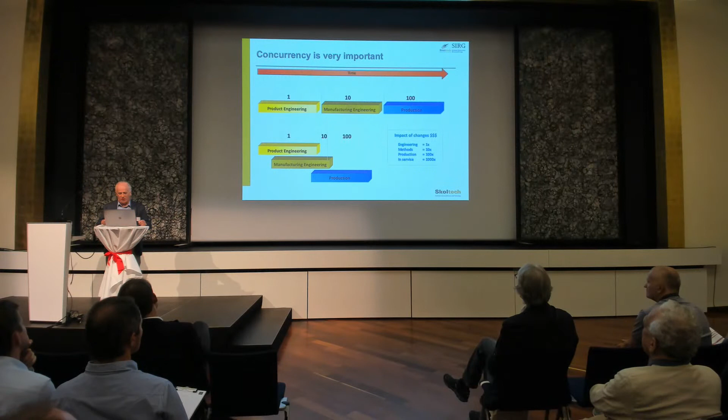So that's where I started. Of course, concurrency, like David said this morning, is extremely important. It's important in terms of errors, and that's what we developed. I will show you a little later a system which can integrate product engineering and manufacturing engineering. But this is just to show you.

Now, the reason why I'm in Moscow is kind of surprising, right? Because I'm from Canada, from Montreal. I'm a mechanical aerospace engineer. I was professor at École Polytechnique of Montreal for a number of years, and I had the perfect R&D job in aerospace in Canada. But I met this guy, Ed Crawley, who published a book in 2016 called System Architecture.

He's from MIT, and he's a friend of mine. One day I went for a conference at MIT, and he said, Clément, I went through my contacts, and he's the founding president of Skoltech, and he said you're one of the professors who could come to help me build this new university. And that's why I'm in Moscow at Skoltech. Ed is a great system architecture researcher, and he's done a lot of work, and we went from there.

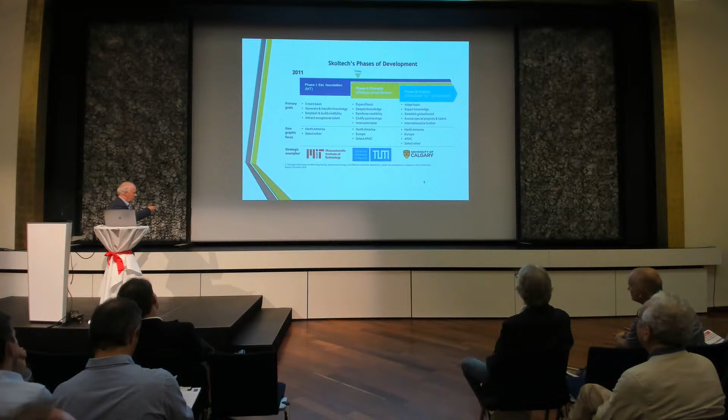Just to give you a brief overview of Skoltech, very briefly: it started in 2011, so very, very recent, in collaboration with MIT, with a very tight collaboration with MIT. MIT was involved in all phases of development of Skoltech. And now we're in phase 2, and we're developing further.

We still have the partnership with MIT. Initially it was in all phases, recruitment of faculty, students, all our students went there. And now it's research projects together. And now we're starting a strategic relationship with TUM also. And we have a strong relationship with the University of Calgary in Canada because of petroleum engineering, as you would know. So that's where we are.

We started when Ed Crawley arrived with his portable computer with nothing in 2011. But of course, a big project and the support of MIT. This is the campus that we have now, that we are installing. And the relationship with Switzerland is that the architects of the building are Herzog de Meuron from Basel. So it's a phenomenal campus.

We are now filling the East Ring, 140,000 square meters of space. So it is a very big and very nice campus. And it's in the middle of an innovation center called the Skolkovo Innovation Center. We are the university here, and there are industrial companies. And it's a city because we have primary and high school, apartments, research centers, startups, and so on.

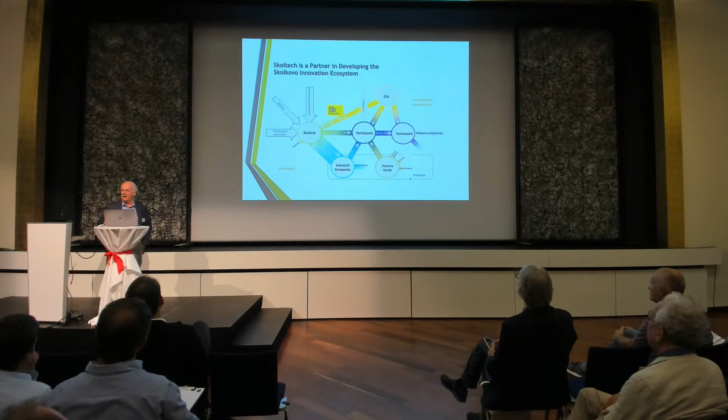So you see that it's a huge initiative, and I have to say that I've been there more than 5 years now. Ed Crawley is back at MIT, but I'm still there.

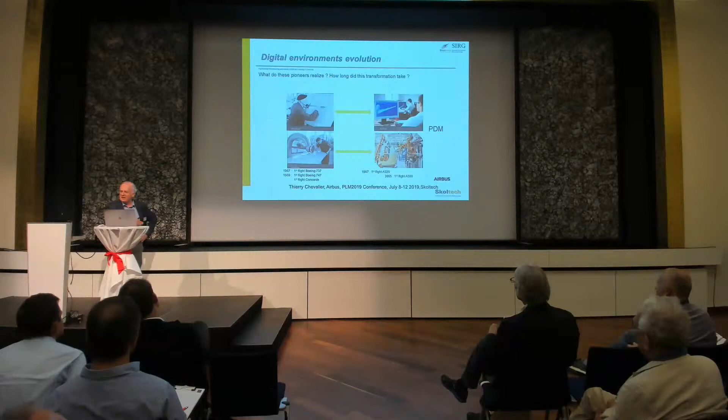Now, let's get into the topic. When you look at the evolution of systems of the digital enterprise and PLM systems in particular, it took about 45 years to go from the drawing table to PDM systems and PLM systems. That's quite some time to go from documents to a digital environment. And MBSE is doing about the same thing, at a much faster pace.

Now the digital twin environment, in 2018, they're doing all kinds of new things, but how much time do we have? We have about 5 years instead of 45 to fully integrate PLM systems into MBSE and cyber physical systems, and AI is coming into that space. So we are on a very fast transformation cycle in which systems engineering is extremely important.

Of course, and I was hearing this morning how important this is. The digital twin is critical, but it's easy said and difficult to do, because if we're looking at in-service, and I'm talking here about in-service and configuration management in particular—doing the right service for the right version of the product in the field—there are some very important roadblocks on the way.

Because think about it: engineering develops a product defined in manufacturing, it's passed to the ERP systems, it's delivered in the market, while the PLM system loses track once it gets into manufacturing and so on. So you need to close the loop again and trace. The amount of information available is phenomenal. We can do it at the prototyping level, one-to-one, but doing it at large scale with multiple configurations is something that still needs to be done appropriately.

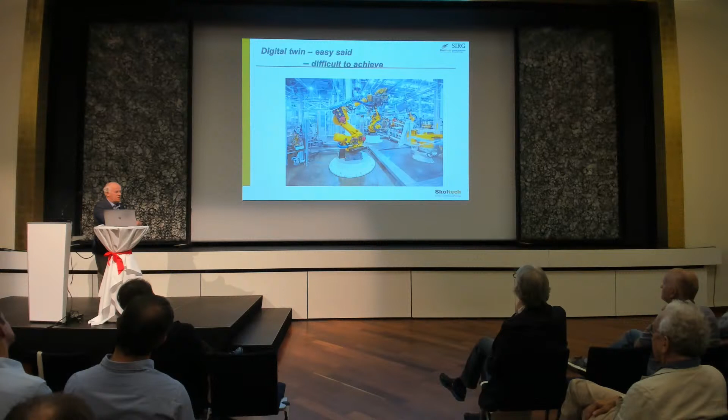And of course, PLM systems have been able to support some of it, but then why is it so difficult to integrate model-based system engineering with PLM systems? I will look at it from a more particular angle here.

You know about this—PLM systems are all over. And by the way, you know what's surprising about PLM systems? This is where I come from: it's that it's called PLM. It was defined first by IBM in 2000, at a time when PLM systems were essentially PDM systems, engineering focused. Now they call it PLM, but they still have difficulty managing the whole life cycle. And I think that model-based system engineering is a critical element to get to this full life cycle management capability.

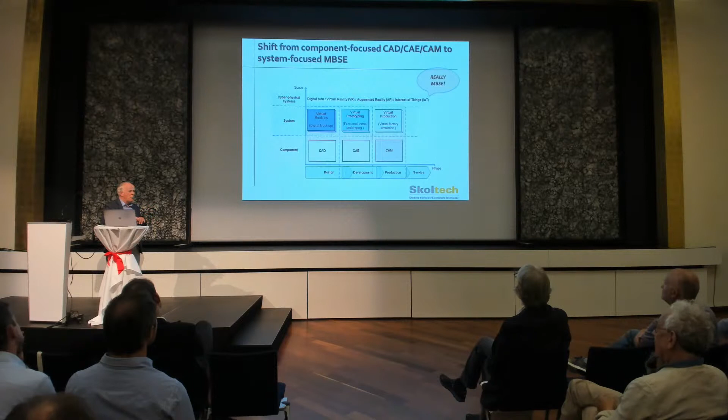So obviously, what we've seen in the last few years is that we've gone from CAD, CAE, CAM to digital mockup, and now we're going directly into a model-based system engineering environment. We're leaving the down geometry-based systems for a much more encompassing complexity.

Now, if you look at the current structure of PLM systems, they're still very much focused on the product structure. They're focused, like David was saying this morning, on artifacts. The master model is the representation, and you can attach a lot of information around it—it is quite possible. But there are important limitations, and let's see what they are.

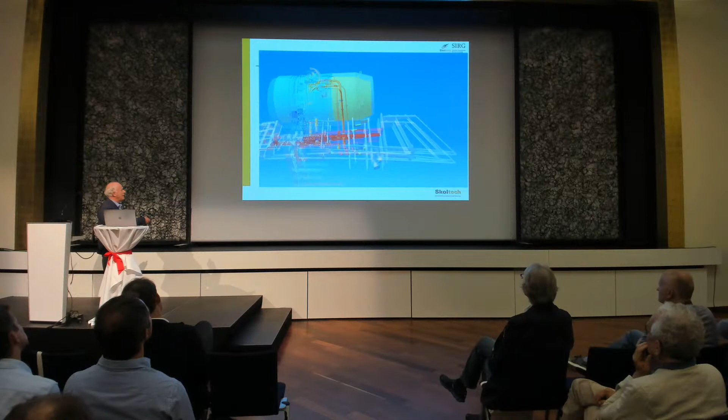And of course, we have these, and we can have very complex models, and we can fly through. We can do so many nice things with PLM systems today, and they're very powerful equipment and software systems, but they're not enough at that stage for model-based system engineering implementation. We need to go to the next stage.

Now, this is the bill of material, data management—this is the core of PLM systems. We can go from products, assemblies, sub-assemblies, and we could put systems, subsystems. But the limitation is that it's based on artifacts, based on components, on physical components. And it's missing some very critical elements, which I'm going to describe in a minute.

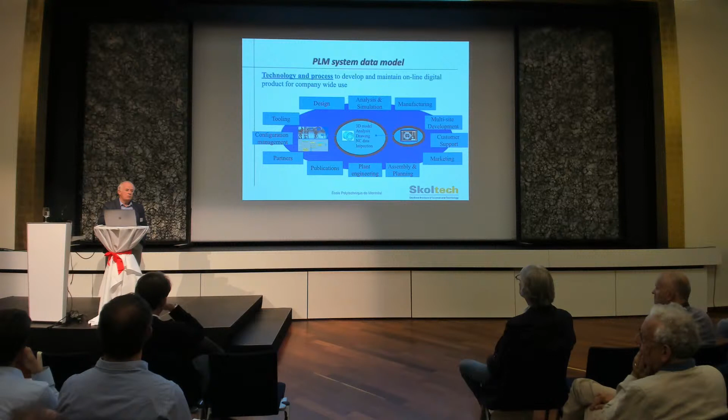And of course, you can put around the master model simulation—you can do simulation right here. Design, tooling, configuration management is extremely important, publication, and you can do all kinds of things. So around the master model, we used to be able to put everything that was essential for product management. Oh, thank you very much.

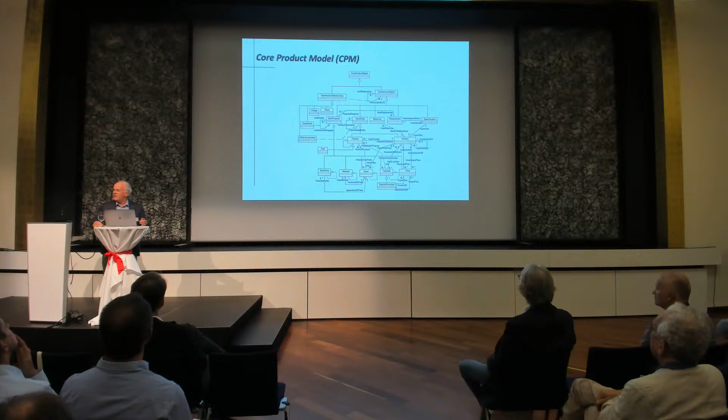Now, I've been thinking about this for a while. Why is it so difficult to integrate model-based system engineering with PLM systems? So I went into the data structures.

When you look at the data structure past the master model, which is essentially bill of material, there is an initiative that was done by NIST, National Institute of Standards and Technology in the United States, that defined around 2004, 2005, a new version of the PLM system structure. It's called the Core Product Model, CPM.

So we'll compare the two, and then we'll see what's missing, and maybe we'll get an answer. Why is it hard to integrate PLM with MBSE?

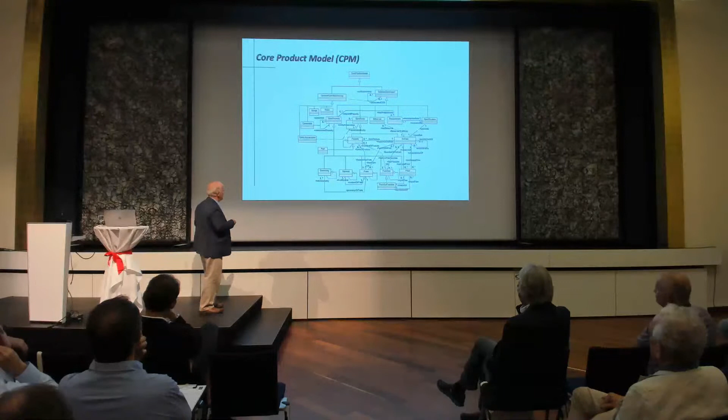Notice here, artifact is definitely part of it, but when we compare this to MBSE, it's quite different. Of course, you know, system engineering comes from the 60s.

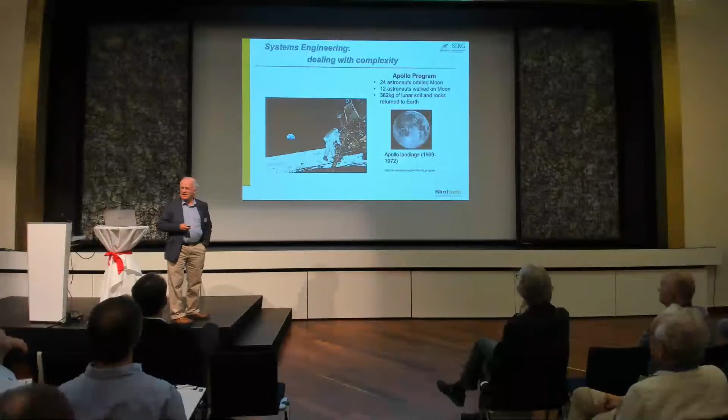It evolved a lot since, and we have the V-Model, which is the key element of this, and it's very different from being geometry-centric, right? We are very much on process.

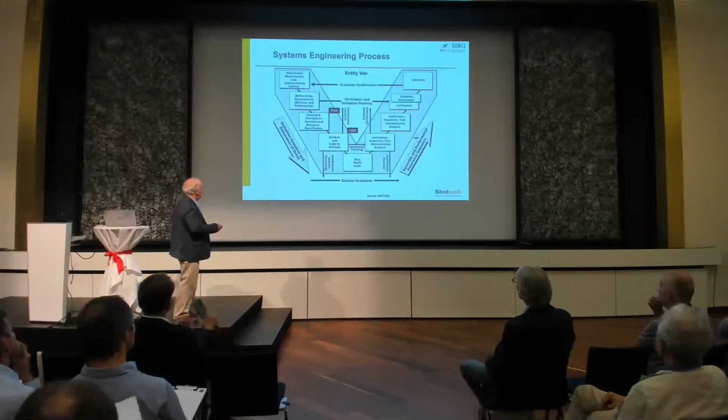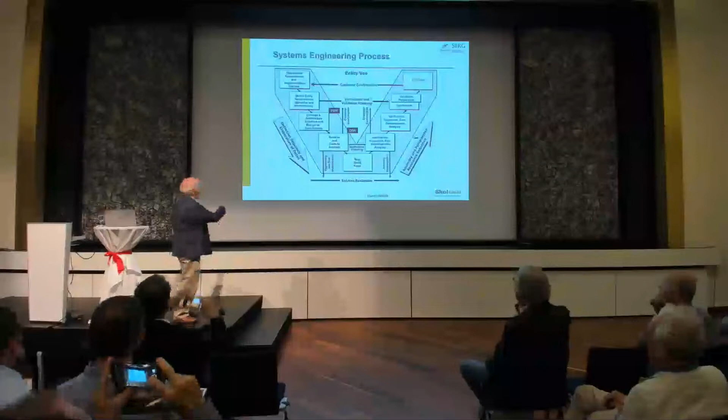If you look at the V-Model, right around here, the build or code directly to the manufacturing, and a little bit of simulation now is happening here, so the design, at the bottom of the V-Model, is the core of PLM. But it doesn't cover, it's starting to cover requirements and going down now, but it's added to the infrastructure. Now, how do we talk about MBSE?

Of course, when we talk about MBSE, we talk about SysML, okay? And of course, SysML 2.0 will be a phenomenal jump forward, but has to be done correctly. But my reflection here is let's look at SysML as a model structure for MBSE as a basis.

In fact, if you look at MBSE as such, behavior is key, and it's key at the concept level. And behavior leads to function, which leads to architecture, and so on. So this is key.

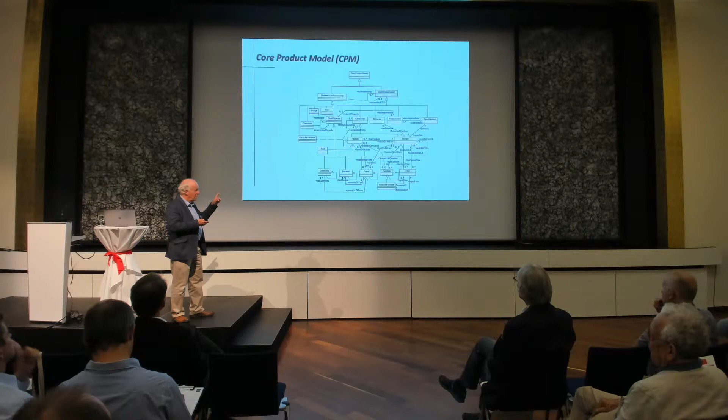So obviously, this is very different from there, and what's missing in one needs to be integrated with this. So the reason why it's hard to integrate PLM with MBSE is because some of the elements of MBSE are missing in PLM systems. Particularly states.

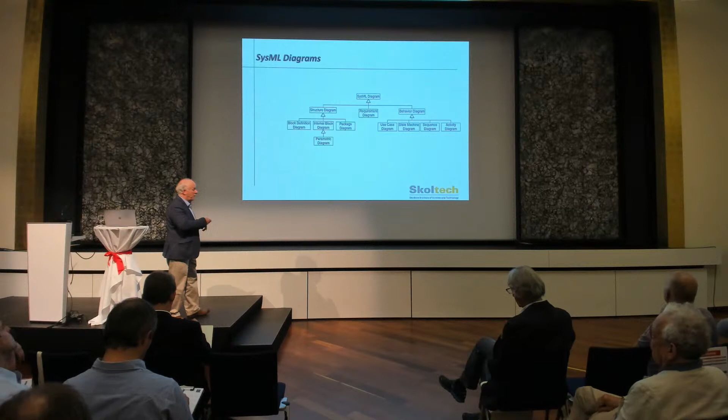Okay, we never talk about states. And if you look at one of the newer, different approaches to MBSE, OPM, Object Process Methodology, done by Dori from Technion and MIT, you have objects, you have processes, you have states, but something extremely important, we have relationships, different types of relationships. And this is something I will come back to.

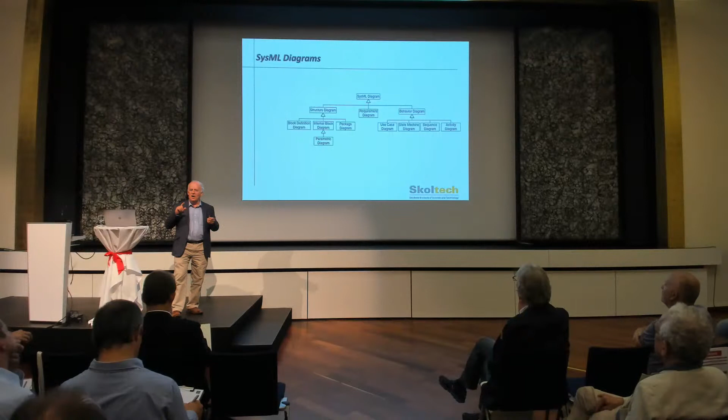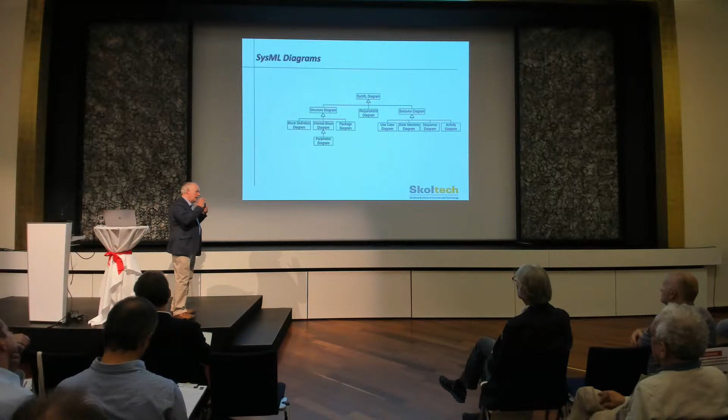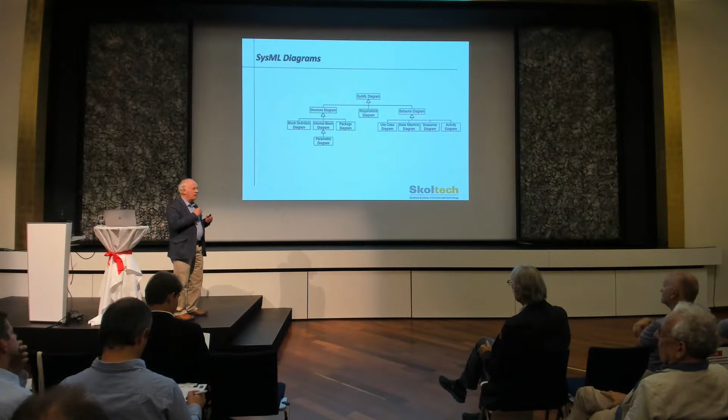So different types of entities, and here we're not making it overly complex. I'm leaving it to the fundamentals, and different relationships, very, very important. The relationship, you see them quite a bit, very well defined in OPM. They're also part of SysML, and this is something that's very, very important.

Let me come back to the original, because this is going to be key. So essentially, if we think about what's happening between engineering and manufacturing, we have to go from form, fit, function. Form is the geometry.

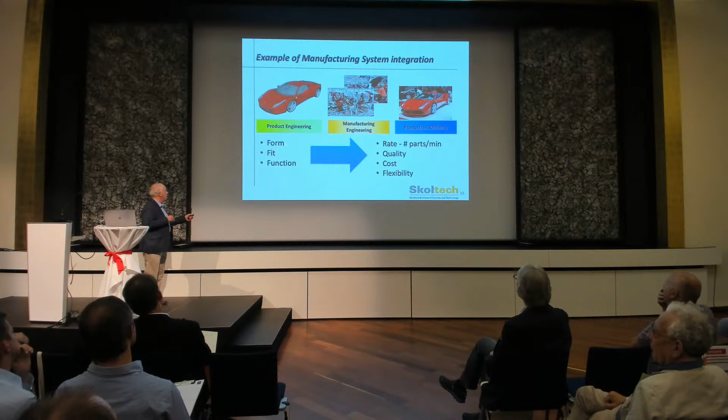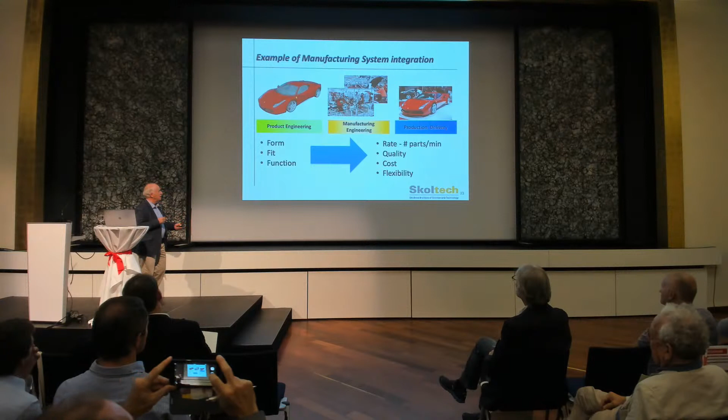Fit has to do with tolerances, assembly, which is so important, and function, which is also extremely important. It comes from the conceptual design. And we have to transfer that into rates, quality, cost, and flexibility. And this is a very important step.

So what I did in the past there is that we developed a system which we call manufacturing process management, which allowed to connect real time to the CAD system, to the PDM, and transfer and go to MES and ERP. All right? But what I want to tell you from this, we learned three things.

The first one is that if you do the relationship between the engineering bill of material and the manufacturing bill of material, you can structure the manufacturing bill of material to represent time. And therefore, the engineering bill of material represents space. And the manufacturing bill of material is a sequence of steps to make the product. So the integration of space and time is extremely important. And that's what we call a complementary data structure. And this is really important.

The second item that we discovered is the importance of relationships. The way we developed this is that first it was a university prototype, then we created a company, and then industrialized it with Bombardier Transportation. And now we had to cover 100,000 parts, millions of versions, and so on. You can see the full product development system.

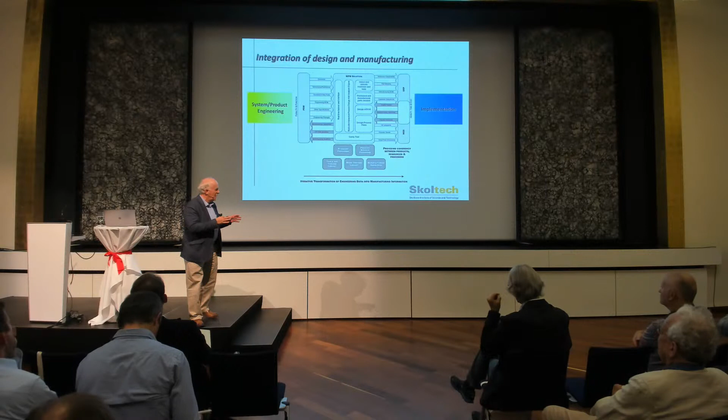So not only the entities. MBSE is much focused on behavior with states, with block diagrams, with sequence and so on. And that's extremely important to represent behavior correctly, with requirements, of course. But you also need sophisticated relationships within the database on each side, on MBSE particularly also.

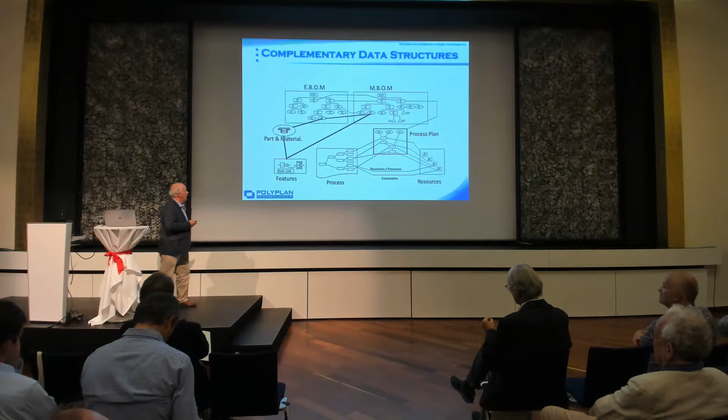And this is just an example of the relationships between the EBOM, the engineering bill of material, the MBOM on the right, the part and material and the features, the process plans, which are the steps linked to the MBOM, and the processes themselves, and the resources, which are the machine tools. So what I'm saying here, in a very high level diagram, is that it's extremely important to make sophisticated relationships.

And David, the first keynote speaker this morning, absolutely said it for MBSE too. Relationships are critical to do this appropriately. And it's absolutely right. This is what we found. And by the way, the second client of ours was Rolex. So we went from trains to sophisticated, and Rolex has a very sophisticated manufacturing system. So the CAD PDM to the ERP.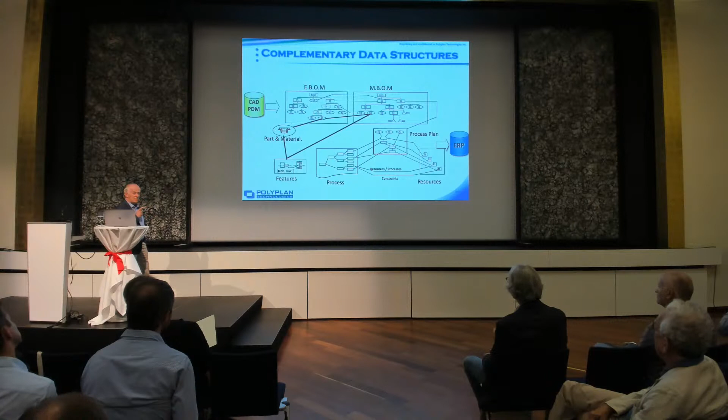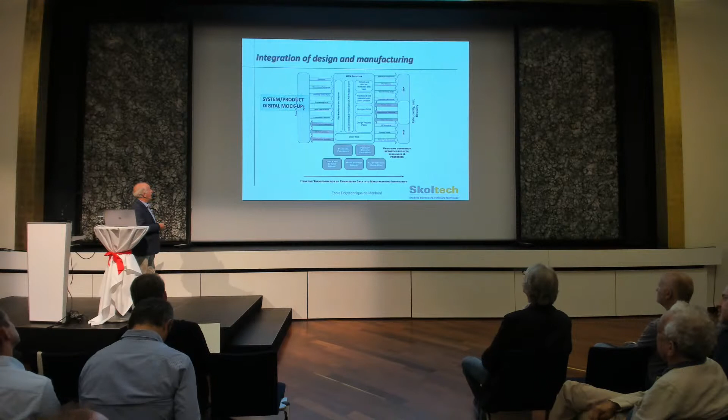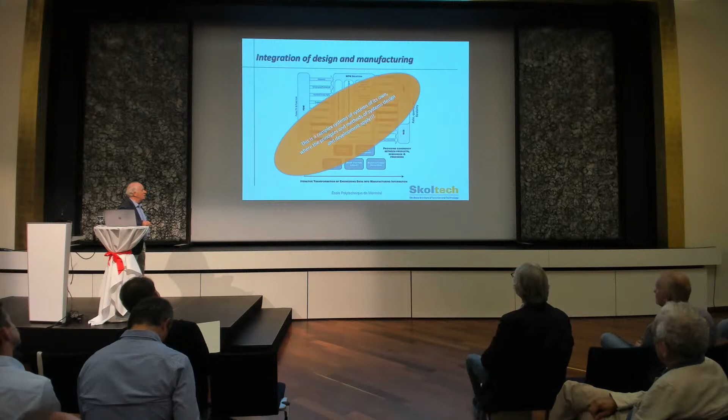But remember what I said earlier, to do the digital twin, we need to bridge fully the CAD PDM under configuration management with the manufacturing system, the MES, and the in-service later. And this is a big challenge. And this is what we have, the system product digital mock-up to the design of the digital factory. And this is something that obviously needs to run. So this is a complex system of its own on the manufacturing level, where the principles and methods of system design and development apply, and MBSE is critical.

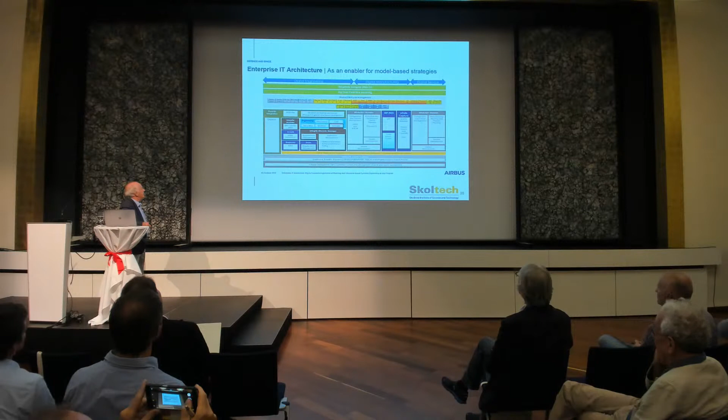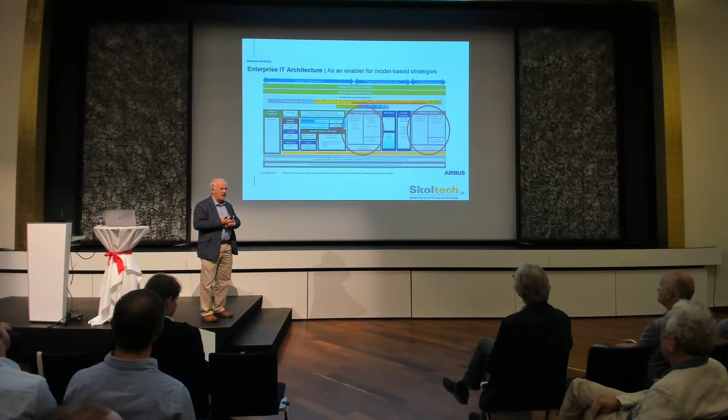So the ideas that we developed on this complementary data structure between engineering and manufacturing, and also the different types of relationships, are extremely important to develop a sophisticated model-based system engineering, or model-based engineering, MBE, which is a new acronym that I learned this morning, right?

Now, a little few details on configuration management. Configuration management is an extremely important part of system engineering and product development. Let's say we have a component here.

We have a component here. You have engineering and you have development. This is further work that we did, development and testing.

You have to realize that engineering develops the product and it keeps improving. Then at one point you'll test part of it. When you go into testing, you will test a particular version which is going to change after. So engineering will evolve differently than manufacturing.

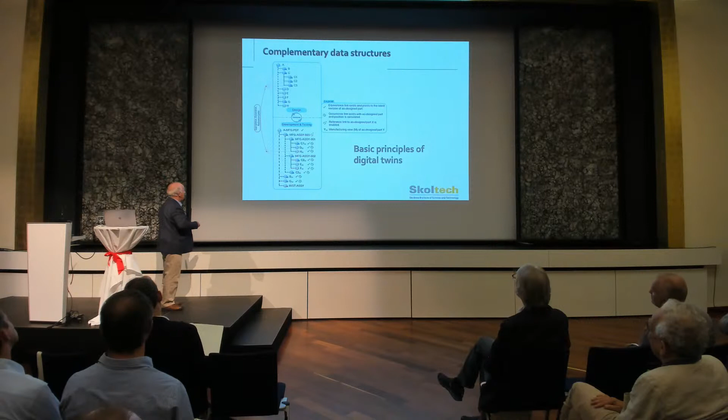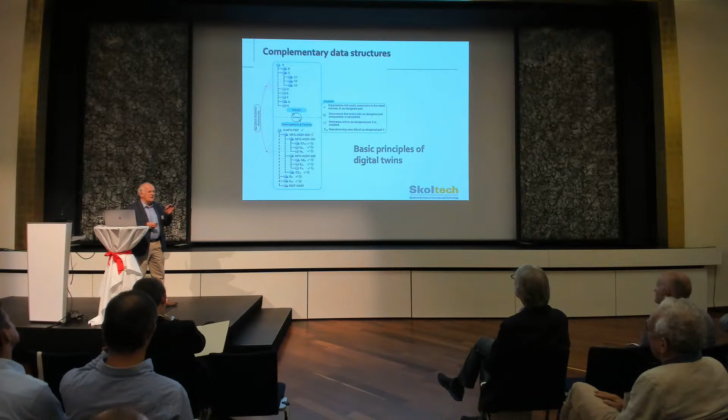So if you look here, this is development and testing. Manufacturing, assembly, and so on will keep moving, evolving on its own, while engineering will keep evolving, and at the end you're going to have to re-synchronize. This is key again for the digital twin principles.

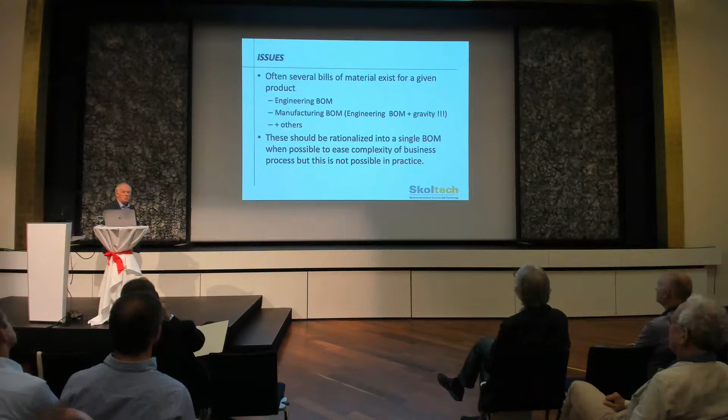Several bills of material exist for a given product. We have the engineering bill of material, the manufacturing, and others. But these should be rationalized into a single BOM when possible to ease the complexity of business. But this is not possible. In practice, multiple bills of materials and multiple versions of the product need to exist.

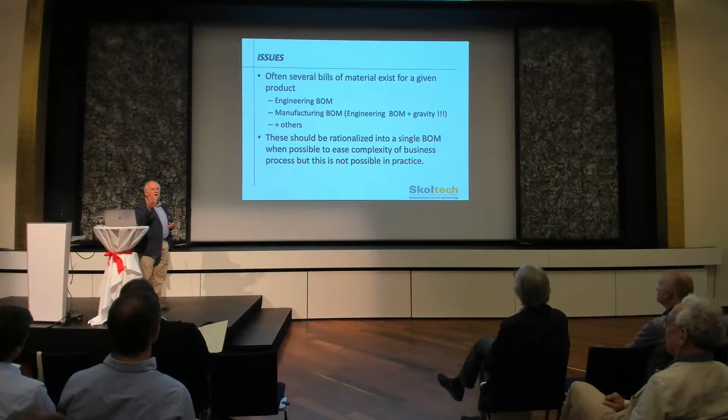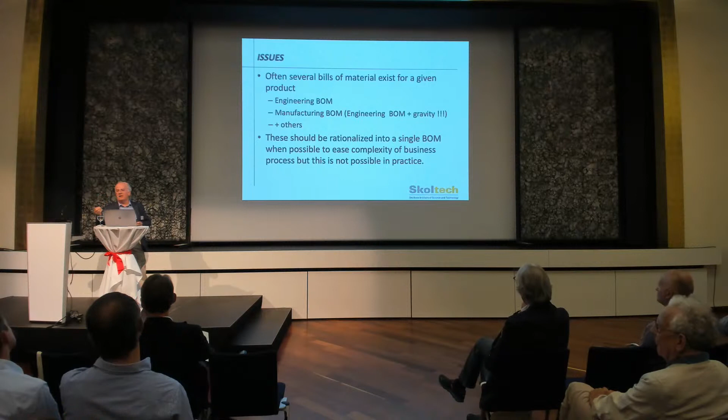So it's impossible, because we have a strategy here: either we make things into one single master model, or we make a much diversified, flexible environment. I think MBSE will need to work from a flexible, diversified product structure and system structure.

Very briefly here, if we look at integration, and this is something we said this morning also, and I heard it many times today, to do MBSE you need to integrate under different dimensions: one, engineering to production; one, suppliers to client; and the other, concept to product, which is the real technical part. You need to look at these three dimensions for a successful model-based system engineering implementation.

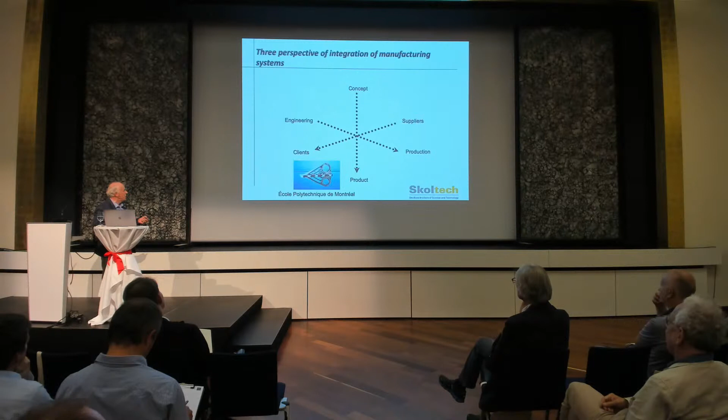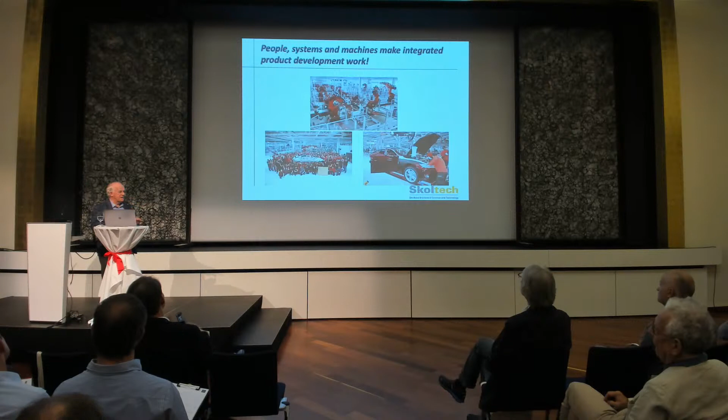Now, a few comments here on the importance of people. There's only one way to look forward as I get closer to the importance of AI today. People, systems, and machines are making the whole complex system work. There's no way around it, we need people-centric systems.

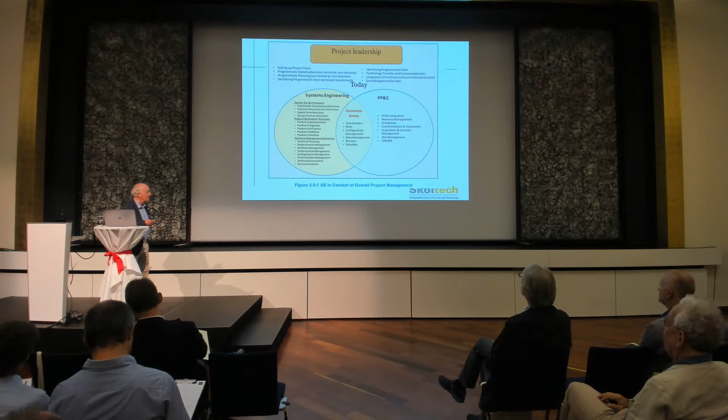I'm coming back to your two pillars, right? And you're absolutely right. This is from NASA's System Engineering Handbook. I could have taken anything. There are two parts of it: system engineering on the left, and project management on the right, the more cost schedule side. These two elements need to be taken care of in any complex system development, and this is extremely important. I'm very glad to see that in MBSE, and that's why I call that project leadership here.

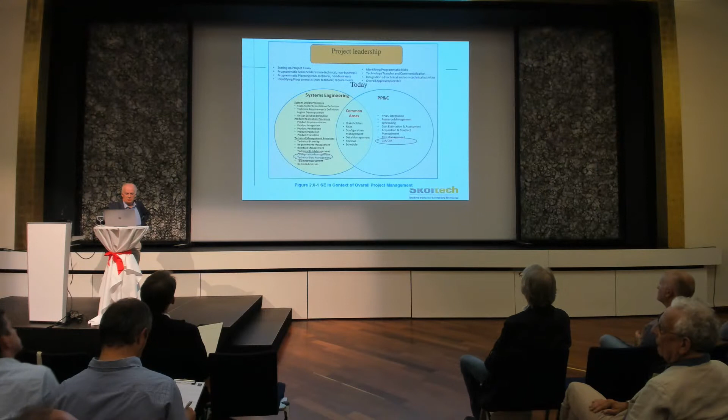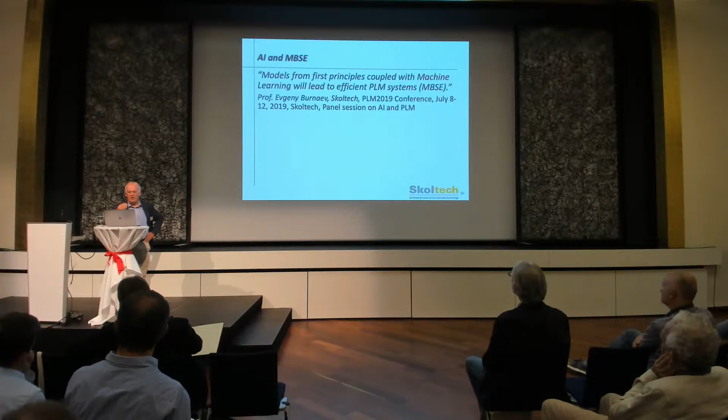Models from first principles coupled with machine learning will lead to efficient PLM systems and model-based system engineering. AI will work well if we have excellent simulation-based but cohesive, coherent models of all scales, from 1D to 3D to 4D models. But these are the only way that we're going to have AI and PLM system work well.

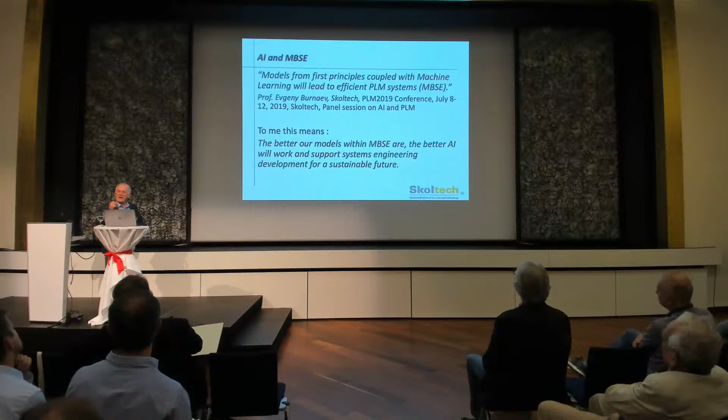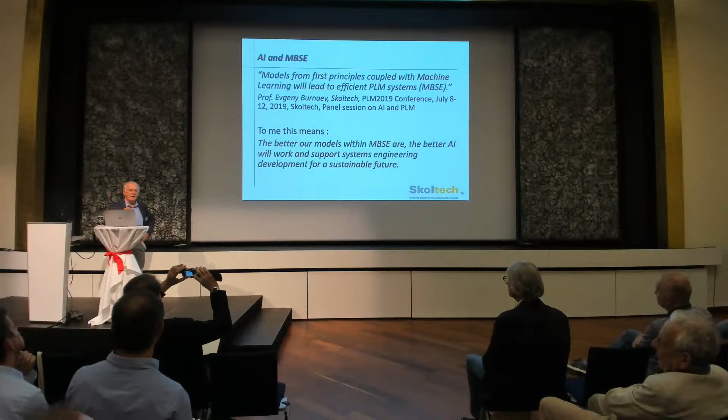That means to me that the better our models within MBSE, the better the models are, the better AI will work and support system engineering development for a sustainable future. They're not independent. They're not independent.

One thing that I've learned from top researchers in the field of AI is that even for so many sophisticated users, AI is still a black box. Even for the top researchers in the field, they don't know exactly why it works, but it works. To me, I'm a mechanical engineer. To me, okay, Watt developed the first steam engine without knowing thermodynamics. I agree. But then to develop the jet engine and the internal combustion engine, you need some rules of thermodynamics.

So we are at the critical time today in digital environments where we have a phenomenal tool that we don't know exactly how it works. And to me, that means to us that we need to be very careful.

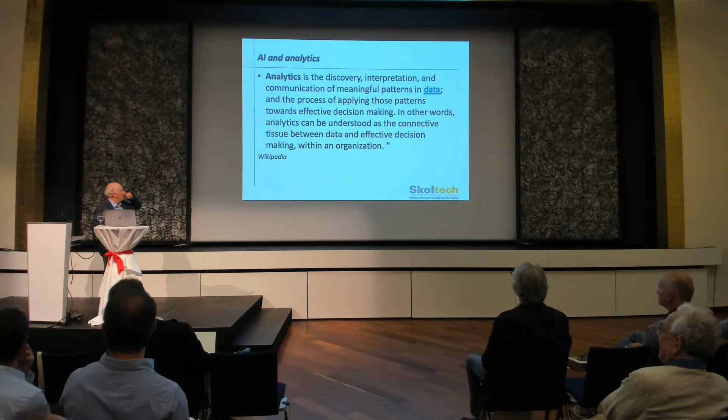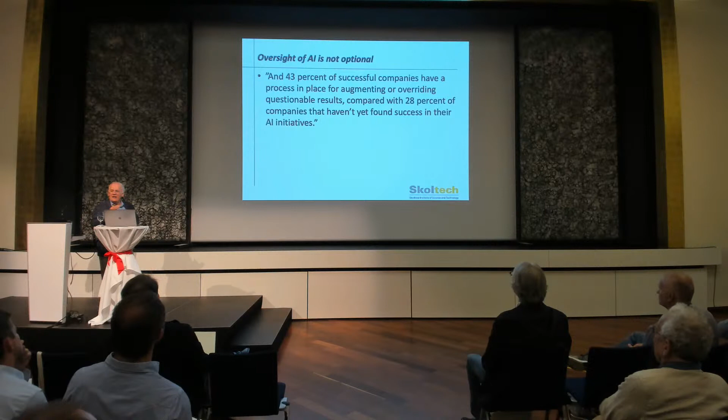If you look at some of the recent studies, they say that 43% of the successful companies have a process in place for augmenting and overriding questionable results from AI, compared to 28% from those who have not tried it yet. What I want to tell, because in complex systems, AI will definitely be part of it. And for people that have been successful, they say, check it.

And to me, that means that we have to put more emphasis on the right-hand side of the V. I say that again. We need to put more emphasis on validation and verification, because we don't know that box. So we need to find the right test case and test deeply to make sure the system will work correctly.

On the importance of verification and validation, another part of it, for example, we would be seeing more widespread use of driverless cars if government oversight and automaker level governance capabilities were able to keep up with the technology itself. Okay, we need rules. We need proper rules. We need the government laws. The laws have to evolve.

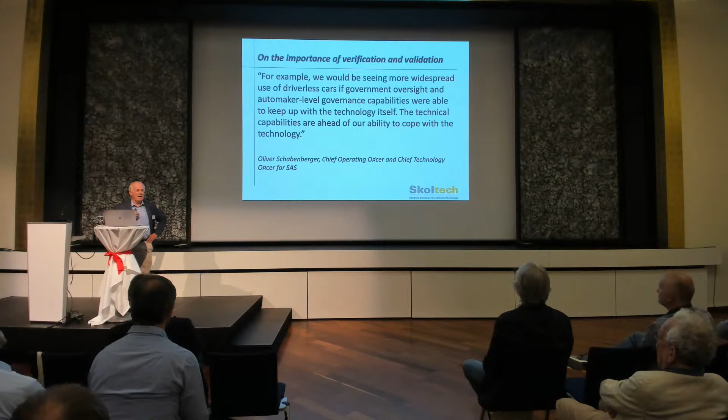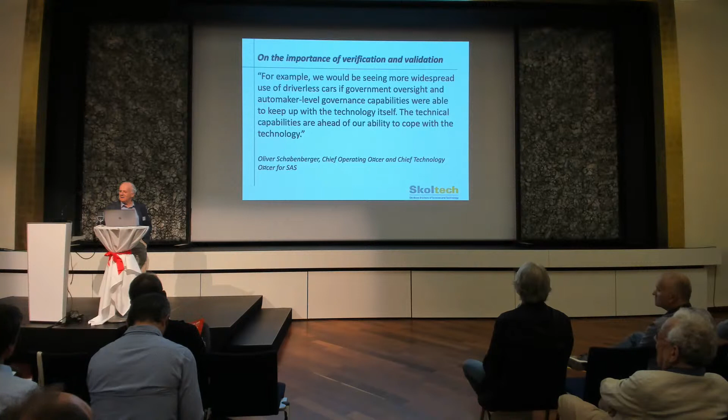But I'm telling you here as system engineers, please be very deep in your verification and validation of systems. And we can mention the 737 MAX as an example, but this is just one example.

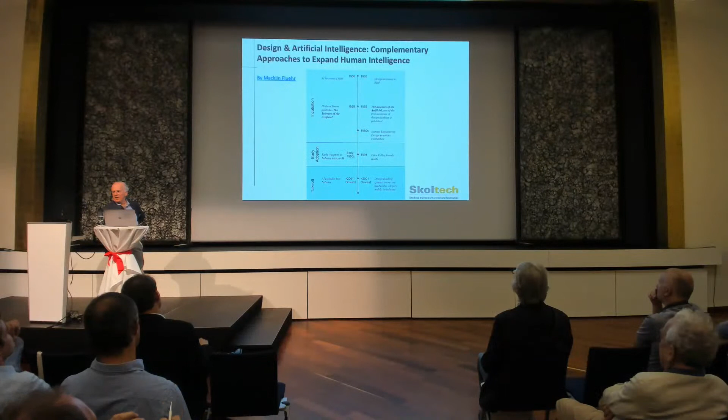And one of my last slides is a reflection which I took from Fluehr: if you look at the evolution of AI and design, and here I make a parallel between design and systems engineering. They're the same to me. All right? So in 1956, design started to exist.

And AI becomes a field in '56 too, okay? And then The Sciences of the Artificial in '69. The first mention of design thinking was published in '69. So next year, you have some authors on design thinking, extremely important. And to me, MBSE, systems engineering, design thinking, product development, it's all the same. And we'll need to integrate those as quickly as possible, including PLM systems and MBSE.

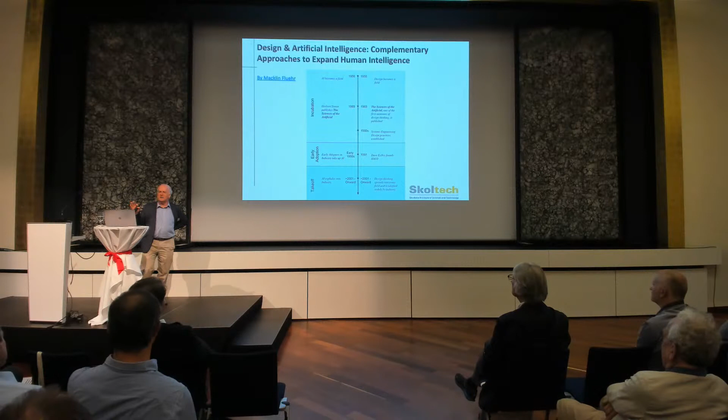And early adoption came in industry in the 1990s. And in '91, IDEO. How many of you know about, raise your hand, those who know IDEO, right? So IDEO is a very famous design organization in Silicon Valley. They marked design thinking, okay, in '91.

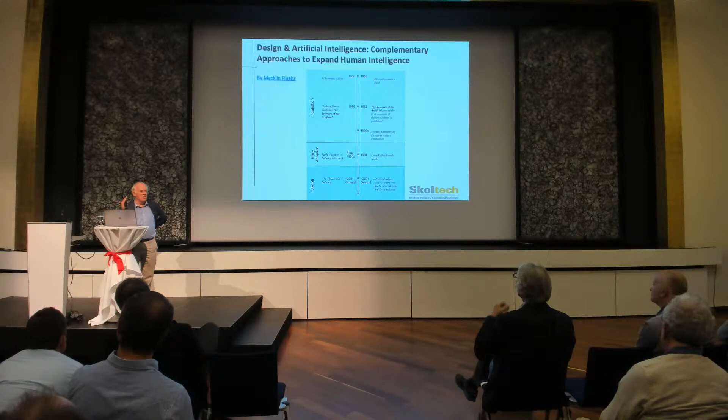And in 2001, AI explodes into the industry, and design thinking is spreading from 2000, and now we're at the edge of this, but the maturity of this will not happen until MBSE matures itself. And it's not through SysML. I totally agree with the first keynote speaker this morning. SysML as a language is too complex for engineers in general to understand, okay? So we need a better, simpler, more powerful representation, which has more capability for model-based representation.

And one comment here, in the early 90s, we did a contract with Pratt & Whitney Canada. At the time, there was an AI platform based on Lisp that was being tried in engineering, all right, for designing components and so on. And we got a contract to say, can that be applied in manufacturing? We did the study in depth, and we found that it was not possible. And you know the reason why?

It's because the relationships at that time in this type of application, which was Lisp-based, were not sophisticated enough to represent the manufacturing reality. So again, I'm stressing the importance of relationships, the types of links that we make between components, as being extremely important.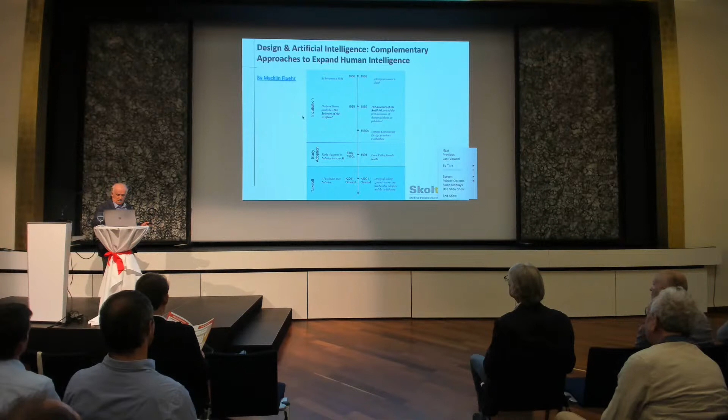Whoop. Why am I getting this? Let's see. Okay.

And my last slide, verification and validation are becoming much more important in sophisticated model-based systems engineering, and particularly when AI becomes a player in our systems.

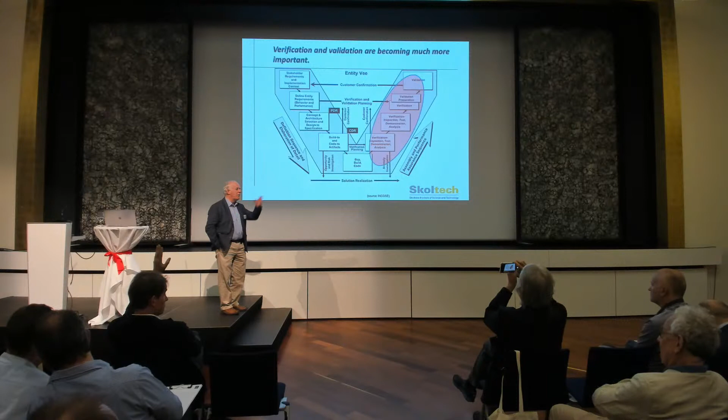You're right, absolutely. So if it's a relationship that over-constrains, you're going to be in trouble. Yes, for sure. And that was the thing that we found initially on that Lisp application, is that it rendered the model very, very heavy and not usable.

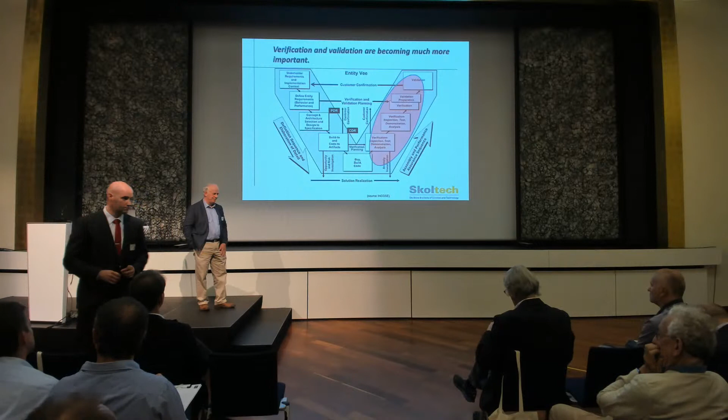You're emphasizing the importance of verification and validation. To some extent, I agree, and some not. The key element is, as you look at that picture you have on the wall, it happens very late. If you find the problems late, we run into deep trouble in terms of the time and cost budget we have. So the key is we have to bring V&V more to the forward part.

Yes. And in that sense, the topic of today, digital twin simulations, may help. Yes. But I think it's really important not to have it in the rear part, in the right leg of the V-model, but really think deeply about how you can test and solve problems early on. Yeah, of course I agree with you. You cannot leave it late.

And for me, the V-Model is an evolution. It's a spiral, right? You need to check as quickly as possible. That's why I believe in agile systems engineering, where you do small developments, check, test, small development, and move around in a spiral. Probably you have to move very tight initially, like was mentioned, and then open it as your product evolves. But you cannot wait late to check and do that.

You're right, this is one of the weaknesses of the V-Model, of systems engineering. I think systems engineering must be improved. It seems to me to be too risk-averse. I think the problem is not the V-Model, it's reality, that if you want to perform system tests, you need the system typically, and these you have late in development. So the key is, and the virtual digital stuff may help us bring it forward. You need to take care of configuration management at that step too, because your engineering will keep moving and you're going to be doing virtual testing. Virtual or physical, you still have the same problem to solve, right? Absolutely, yes.

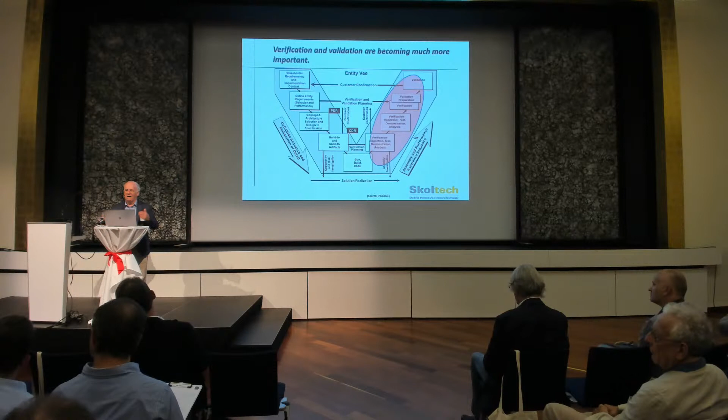More of an open question: MBSE, PLM—PLM has all the power today. Where do you think we'll go? Will PLM move to MBSE, or where is the MBSE power to bridge to PLM? Well, where do you think is it going? You saw it in the presentation of Siemens today, right? PLM will have to embrace the concepts of MBSE. They already did it to a certain extent, because some of them integrated with Cameo, some of them have their own...

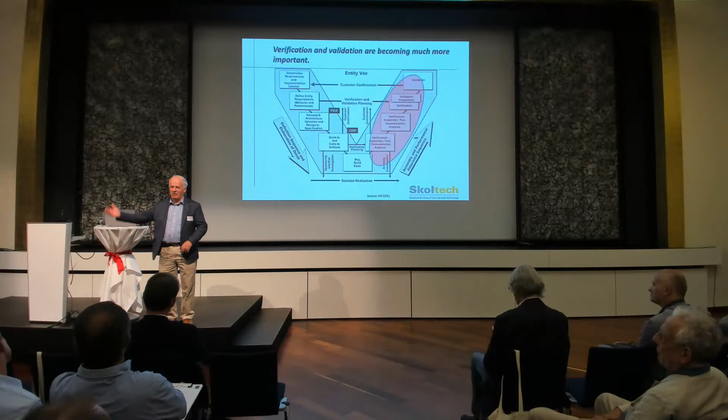SysML integration, because MBSE, I would say, is way too limited, linked to SysML. We have to raise the level of model-based systems engineering and then bridge PLM and MBSE. So, of course, the critical mass is in PLM in terms of business and so on, and the expertise is there, but we need to go away from the artifact-centric, BOM-centric data structures.

And one of the greatest difficulties—when we developed manufacturing process management, I had many discussions at the time with the people from Unigraphics, before Teamcenter—the problem is legacy. It's not going to be easy. So maybe there'll be newcomers coming with a different approach, but the merge is definitely coming. No doubt about it.

Is there an additional question?

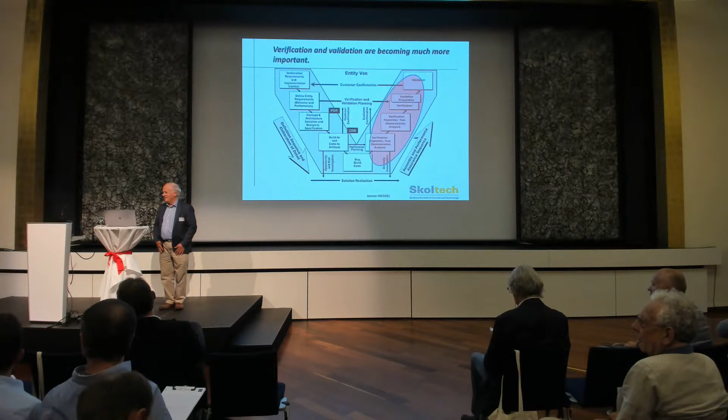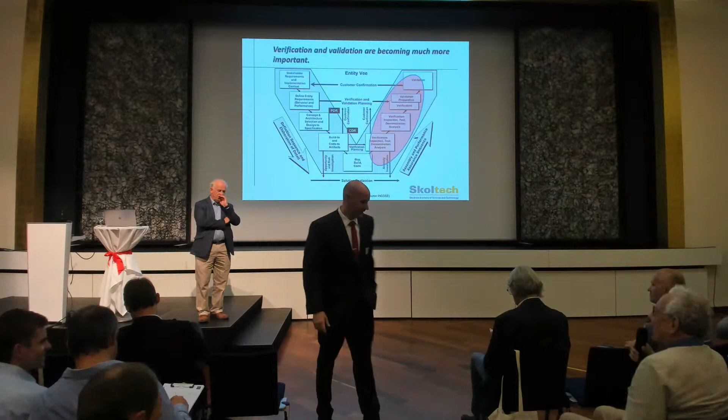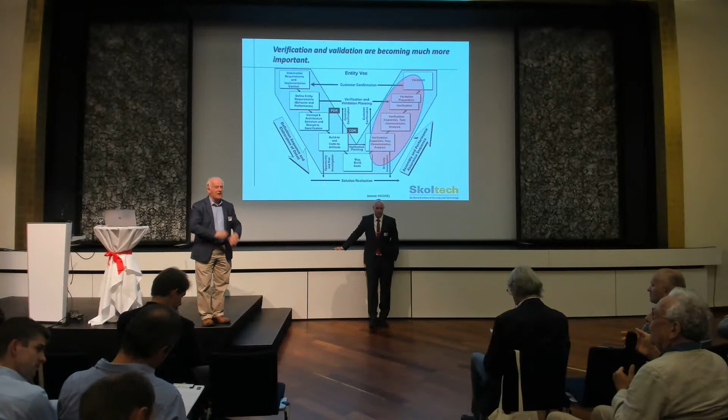Thank you. I did not get really the point why to get away from the artifact model. Is it not rather the point to broaden the scope of an artifact so it can also include some, and then you can stick to the old PLM system, and in fact your model-based system is simply a new BOM, or a bill of artifacts, or broadened artifacts. Sure, I agree with you. What I mean is the artifact is physical, the simulation is attached to it—it's very important—but we cannot just be artifact or BOM focused. States are important, behavior is so important that it's going to have to be part of new PLM system approaches. That's what I think, but you're right. Thank you very much for your comment.

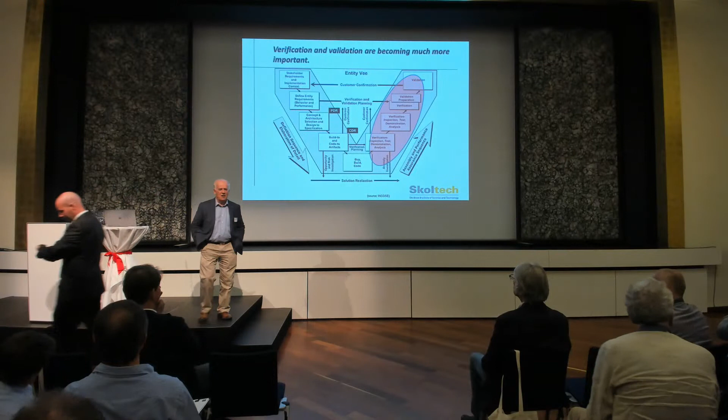I love the AI part of the presentation, and I saw nobody ask, so I said I have to ask because it's part of my hobby things and I love to do. The question is, from your experience, how long do you think it will take for the systems engineering community to start doing things and verify these AI implementations? Because it's a little bit painful, based on my experience, because software engineers asked these questions 30 years ago. Do you have a prognosis for how long it will take?

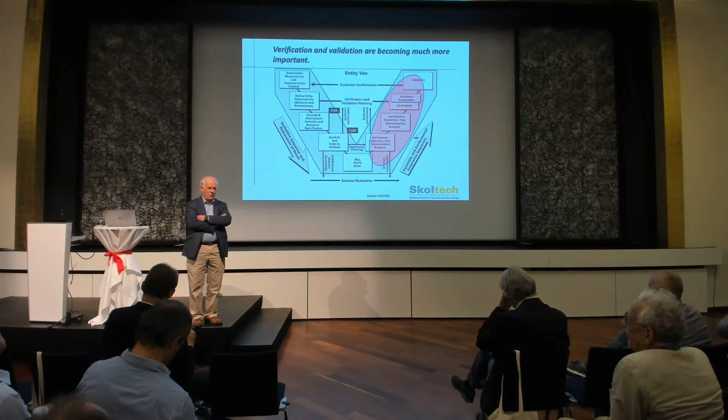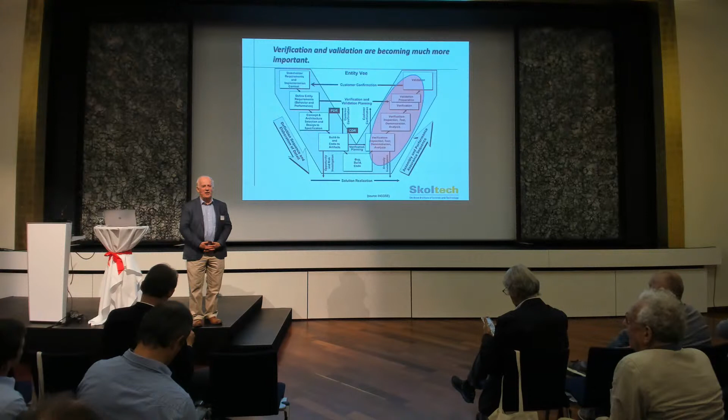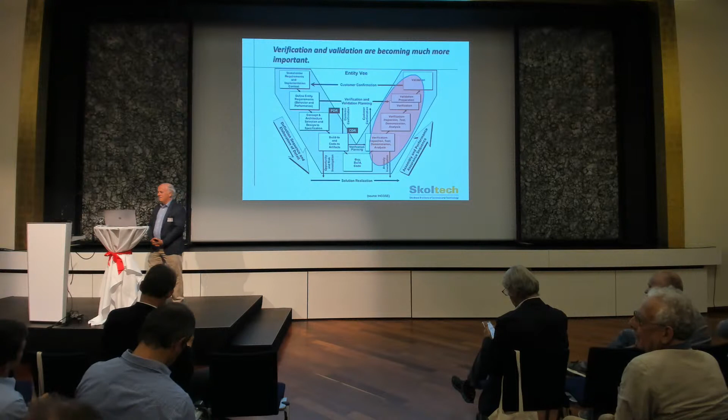If we don't want huge catastrophic failures like the 737 MAX, the time is now. That's why I wanted to talk about it, because I think this is so important today. So, learning by pain—of course, and we've always done it, but hopefully we'll be smart enough to do it right, better. Okay? Thank you. That's it. Thank you, thank you.

Okay, in this case, we continue with...